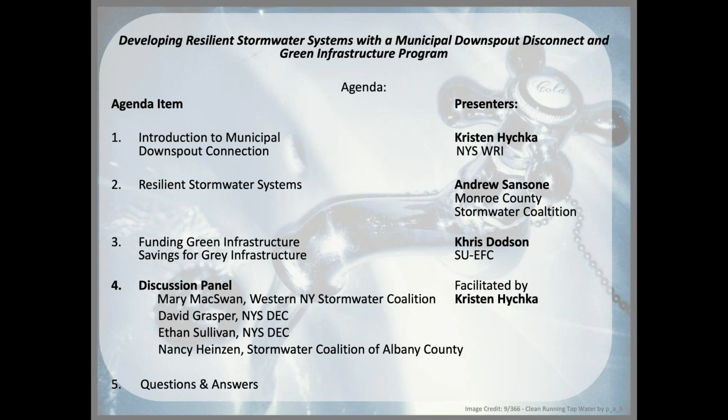And so I'm going to exit out here and hand over the presentation to Kristen.

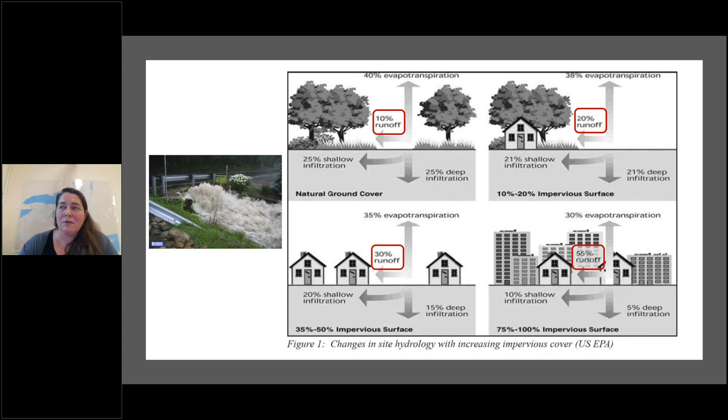So why are we here? You showed up, so you have your reasons for being here. But generally speaking, you all have seen this, or you live this experience. We're seeing increased runoff for a number of reasons. One being increased impervious surface cover, reduced infiltration, and increasing runoff.

Another piece of the picture here is that we're seeing more extreme precipitation happening in extreme events. What I'm showing right here is historical data. This is not any forecast. This is just looking at 1958 to 2016. What has been the change in extreme precipitation? In this case they're saying how much of your annual precipitation happens during those 1% largest storm events. So often what you're designing your systems to handle.

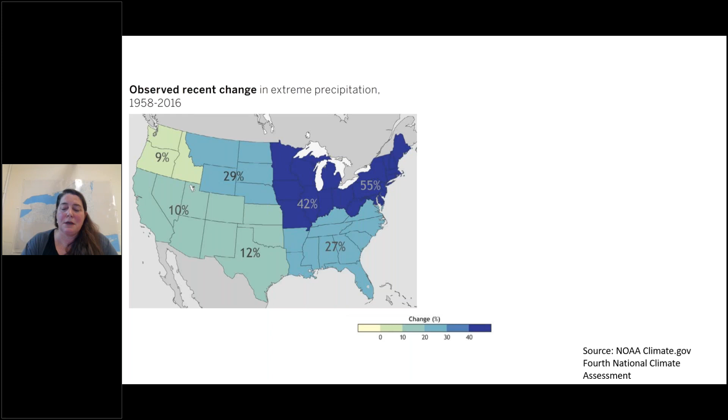And what this is showing is that there's a huge change, and we're right in the center of where all that change is happening up here in the Northeast. And this is showing forecasted, so projecting into the future, this is actually going to increase. As we get towards the later part of the 21st century, we're going to see even more of our precipitation coming in the form of extreme events. As we all know, there is some uncertainty around that, but we're definitely seeing that in the data already. Again, as I said, on the left here, these are observations we're seeing.

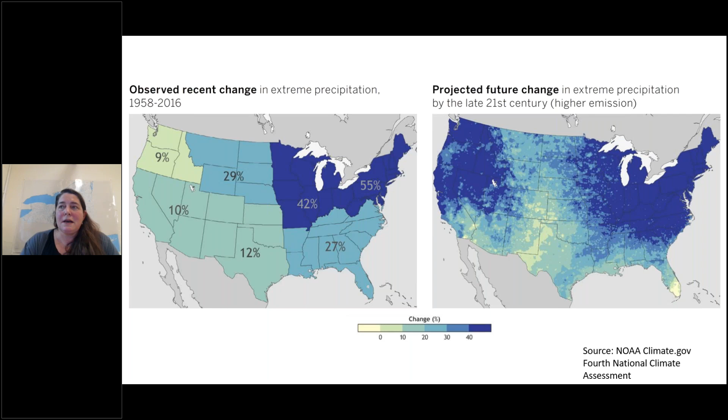So all this is happening in the context of New York State, where in many places we have aging and undersized infrastructure. In 2017, this is just one piece of information about that from the New York State Comptroller: they estimated we needed $80 billion to repair, maintain, and replace drinking and wastewater infrastructure in New York over the next 20 years. That isn't just talking about this undersizing issue, it's obviously much more than that, but it gives a sense of our context, what you all are dealing with. You are all on the front lines. You are all trying to make decisions about how to maintain and improve New York State's water infrastructure.

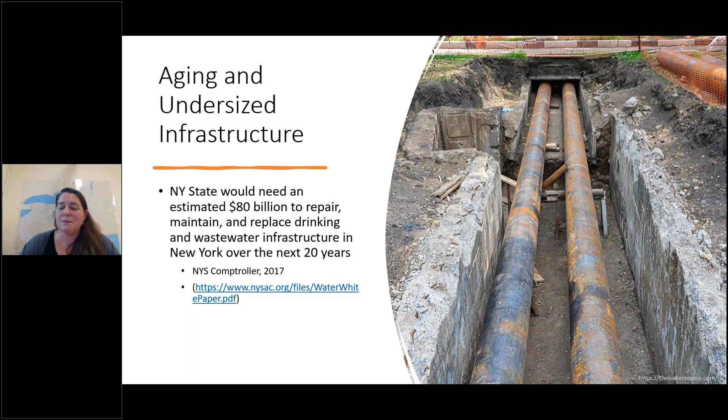So one piece of this puzzle is, ooh, and some of my graphics didn't come through here. That's all right. So can you see my pointer, Meredith? Can you see that? Yes, we can.

Great. Okay. So basically, when we're talking about disconnection, and I'm guessing most of you are familiar with this, connections are when a downspout, or, and we don't show it on here, maybe a sump pump from houses or buildings, is connected directly to the sanitary sewer system. So not just the sewage, but during rain events, you're getting water into the sanitary sewer system from houses.

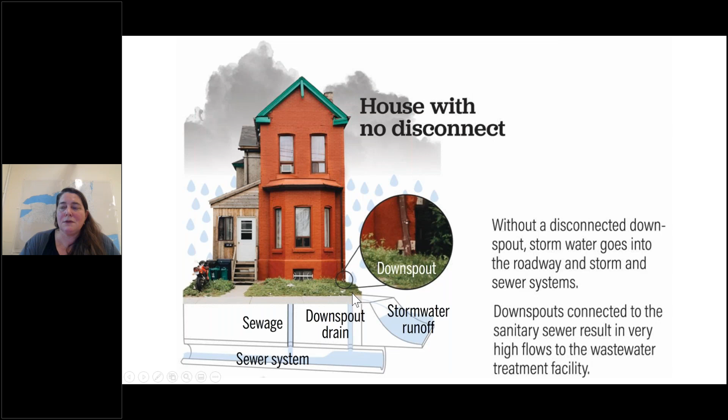So this is from the town of Olean, and what they estimate is that a typical 8-inch sanitary sewer can handle domestic sewage from 225 homes, but it only takes 5 sump pumps operating at full capacity to overload an 8-inch sanitary sewer. So this can be a huge problem in your municipality.

So this is when, and unfortunately this whole graphic didn't show up, but basically what it's trying to show is that one of the things you can do is disconnect those connections. So take out your downspout and your sump pump connections. What ends up happening is you'll get less water into your sanitary sewer system. You may be exacerbating local flood conditions.

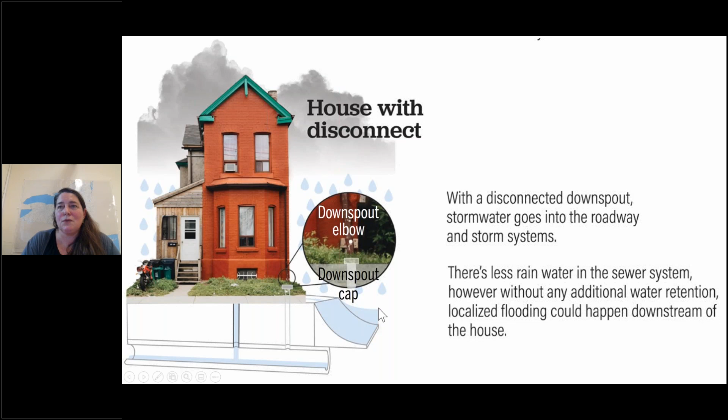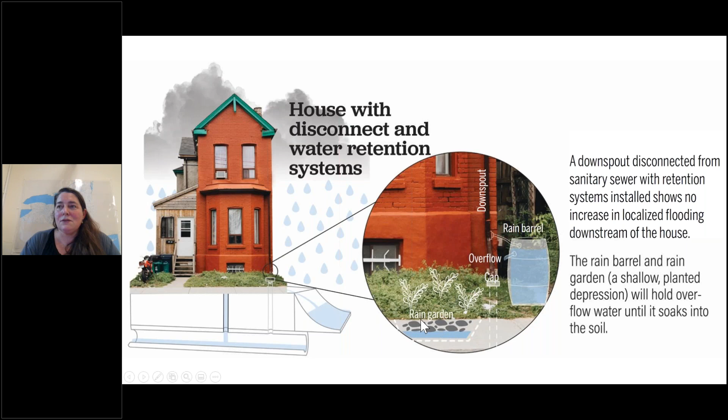So pairing this disconnect with some kind of localized green infrastructure program, not only will it reduce these connections to the sanitary sewer system, but also provide these localized benefits. So generally, it took us a while to come up with a title for this. There's a lot of pieces to what we're talking about.

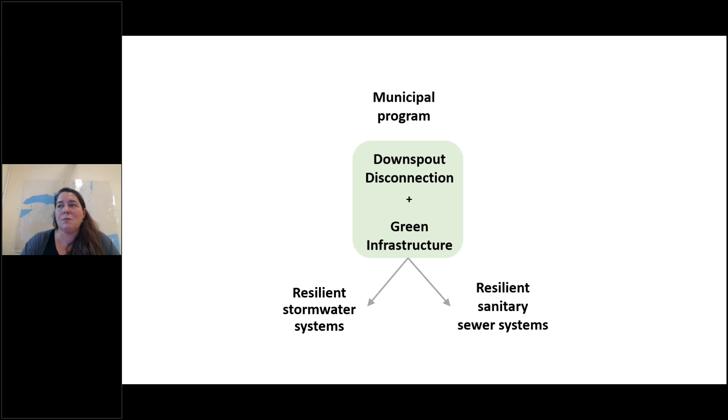But basically, what is the program or the coordination that you could put together either at a municipal or regional level that deals with connecting disconnection with green infrastructure to improve and create resilient stormwater systems and resilient sanitary systems? And we're fortunate to have our next speaker talk about this in more detail.

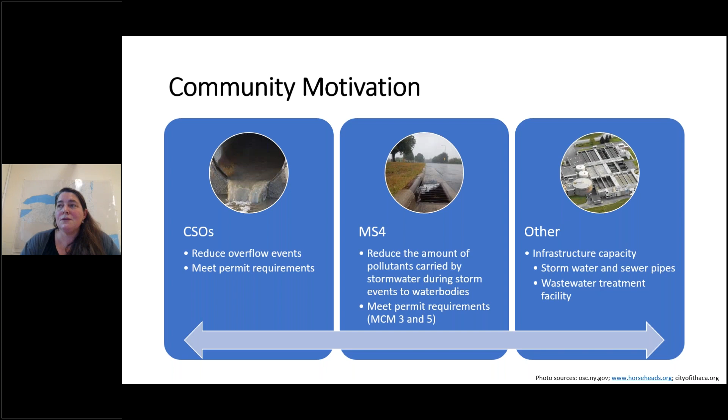Community motivation. So again, our next speaker will talk about this too, but we're all coming from different regulatory coordination levels. And so some people are doing these programs because they're a CSO and they're under a decree. It may be an MS4 and you have permit requirements, or others are just dealing with infrastructure capacity issues. So one example in a CSO is Washington, D.C.

They created a big program, Drain the Rain and Clean Rivers Project, where they developed a voluntary program for free downspout disconnects, free rain barrels, and free technical assistance and design. So they actually had people coming out to the site.

So I just have a minute here, so I'm going to breeze through this. But we put together a report kind of based on this experience. We had a master's of regional planning student who had worked at DC Water, and she was trying to pull some of the knowledge and experience into guidance that would help local municipalities.

So this is roughly the timeline of the steps: setting your baseline, determining your budget, determining your program structure, setting your timeline, target audience, and then structuring your outreach efforts. So I'm going to stop here just a minute, but talking with the speakers and panelists, they will get into this more. There's really more to this. You really need to assess your enabling conditions for green infrastructure and also think about funding for program development.

So I'm going to breeze through all this, but these programs can vary greatly in how they're administered, whether they're voluntary or compliance-based. The types of resources that are provided, are they free? Is there just some kind of incentive? And then how are you tracking it? So some of the resources we share are technical. There's an outreach strategy. There's a program comparison where you can see lots of different approaches. So there's many, many ways to go about this.

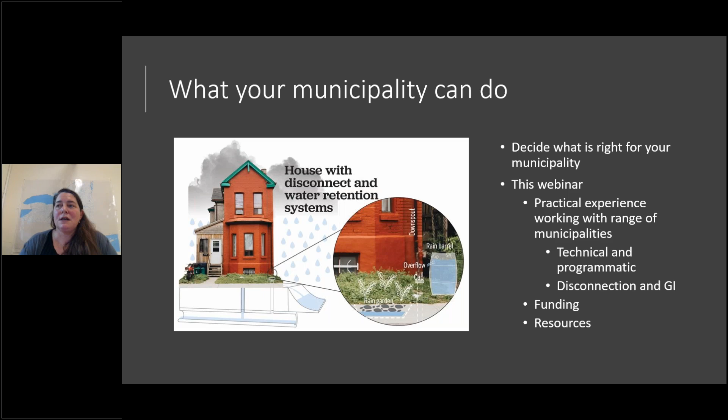And then there's a checklist, some of the first steps you could take and some of the questions you might ask. So to finish up here, again, decide what's right for you and your municipality. What are your motivations? What do your plans look like? And listen and hopefully use this webinar to learn from the practical experience of the folks that are on this call: technical, programmatic, disconnection, green infrastructure, and learn about funding and the resources that are available.

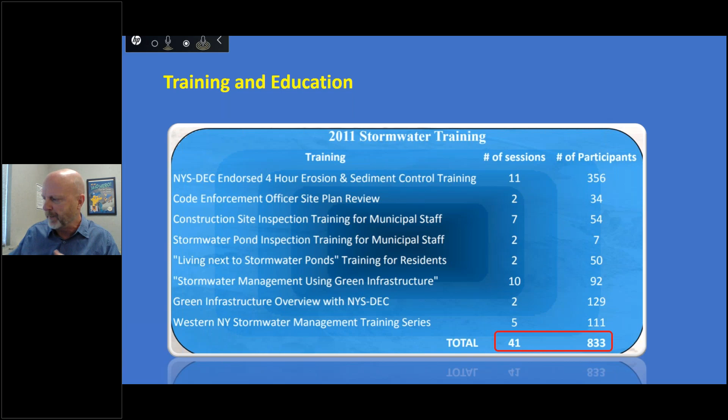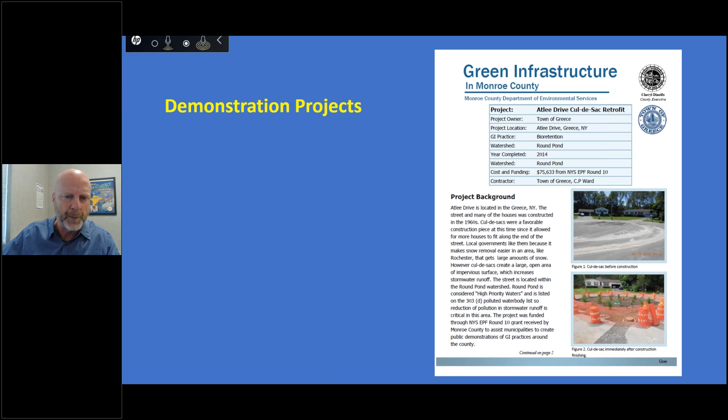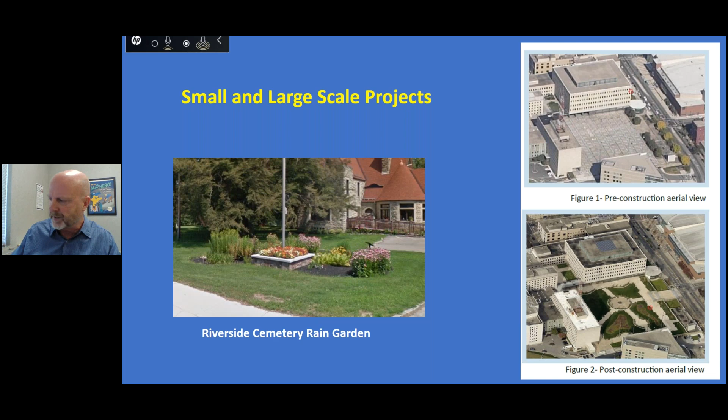So here's a little rain garden at a cemetery, and a very large green roof in the city of Rochester owned by the county. The roof is actually on a parking garage that's underground. So we took this large impervious area and built a green roof on it. So we tried to do these practices of all different shapes and sizes.

So what have been some of the obstacles? Of course, education, helping people understand what we're trying to do. Demonstration projects, some are successful, some are not. That's why you do them. And sometimes when you're the first one to do a porous concrete parking lot, and maybe it doesn't go well, that's what you learn from. That's what you're demonstrating, and so those are important.

The public and private. It's encouraging to see not only a lot of municipal people on this call today, but also a lot of private sector and consultants. We really have to work together to understand and develop and design these practices. And one of the obstacles that we saw right away was building codes, and that's something that Christian mentioned.

And a project that we did that was funded by a grant, we used the Genesee Regional Planning Council and Jamie Tholman, if many of you know her. We did this assessment with a half a dozen or so municipalities, where we went through and used the Center for Watershed Protection worksheet to look at their codes. And what we wanted to see is, what are the obstacles to green infrastructure in terms of connecting or disconnecting downspouts, the size of porous pavement, the size of parking spaces, the number of parking spaces. All these things are in the municipal codes.

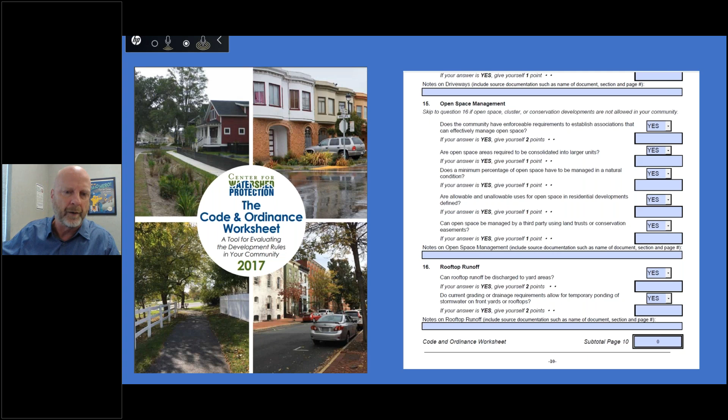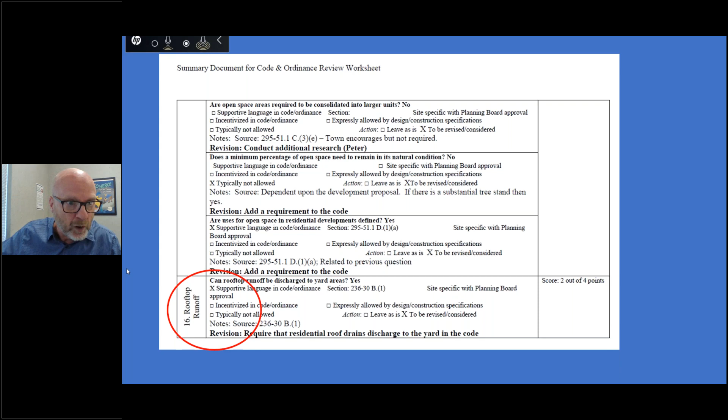And if you can understand where they are and go in then and change some of these codes to make green infrastructure a little bit easier to implement, then it just helps you. And so, in terms of downspout disconnection, one of the areas on this questionnaire was on rooftop runoff. And you can see, the question asks, is a disconnected downspout allowed? And some of the responses that we got to can rooftop runoff be discharged to yard area? In some of the cases, it was no. Planning board approval was required.

So anytime anybody wanted to build a new structure and have a disconnected downspout, it would have to go to the planning board for approval. So once you uncover that, then you can modify your code, which many of our municipalities did, to say the downspout can be disconnected if you have the appropriate soils, or if it goes to a rain garden or bioretention.

And one of the other bits was, is ponding water allowed? The reason downspouts are connected largely is people don't want ponding water in their yards. And so, if you want to allow a disconnected downspout, you may have to modify your code that says, yes, ponding water is allowed for a certain period of time.

So that was a big obstacle for us, and I think we overcame that in many areas. And so here we are today, 2021. We're in, I guess, what we think of as the implementation phase. We aren't doing quite as many demonstration projects. Mostly what we see with green infrastructure is from new construction. We aren't doing a lot of retrofits, unless it's a redevelopment project, and I think that's a funding issue, right? So we would like to do some things in right-of-ways and municipal property, but it comes down to funding and being able to do that.

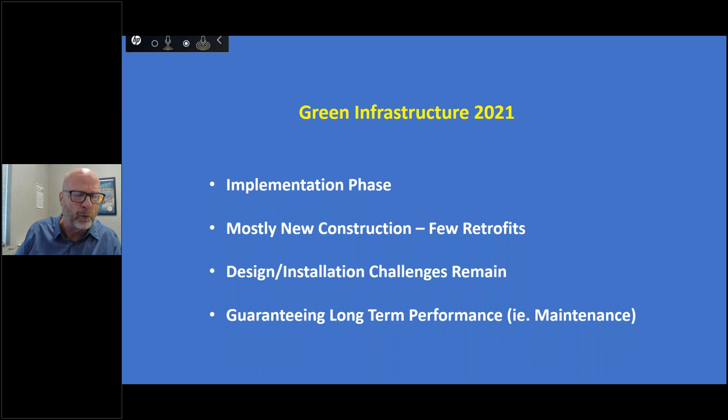Design and installation challenges, we had those early on, and we still occasionally see that, where we have a practice that doesn't go in quite as it's designed to do. Kind of one of my main interests is guaranteeing the long-term performance of these. And that comes down to how we're going to maintain these practices, along with the practices that we already have.

So just some examples. So here's one, a design or installation flaw. We're not sure which one, but here you have a bioretention, you have a curb cut, and the water comes in and just directly goes into the catch basin. So all the vegetation is above the water line, so to speak. So it's really not a bioretention. So we're not sure if this was a design or an installation problem. My thinking was an installation. We've run into some challenges where folks don't generally understand what the function of some of these types of things are.

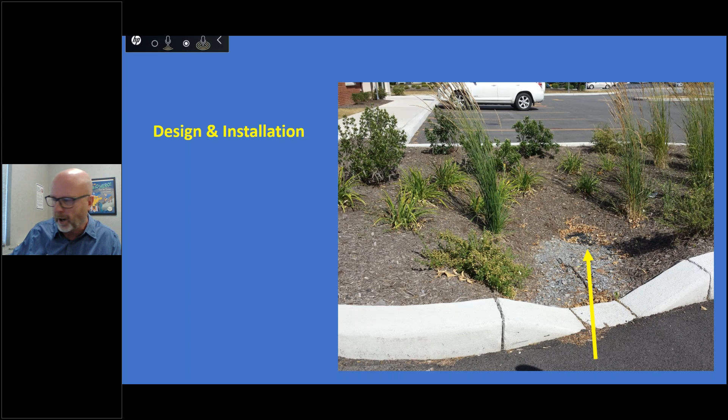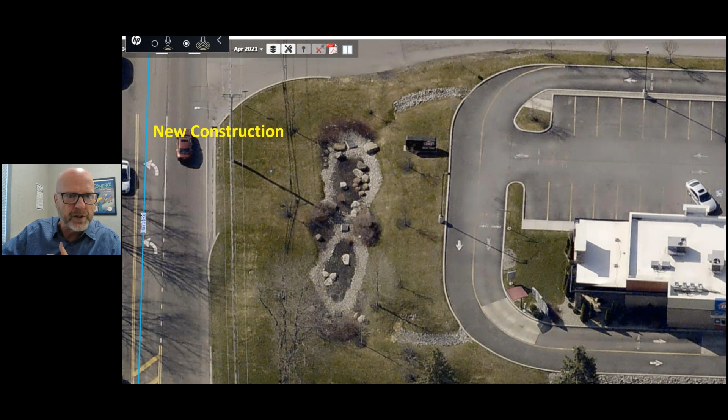But we get a lot of new construction and a lot of it goes in fairly well, right? So here's commercial development, kind of what's become the standard practice for us for bioretention. This is a county facility, our fleet center, where we did a big project. We built this building, and to be honest, the simplest practice we could put in was downspout disconnection. It really requires no maintenance other than the soil area, the vegetated area here where the water is going to run. It's a simple practice. We needed something in this area that was going to be low maintenance, and we went with the rooftop disconnection. So we're pretty happy with how that's gone so far.

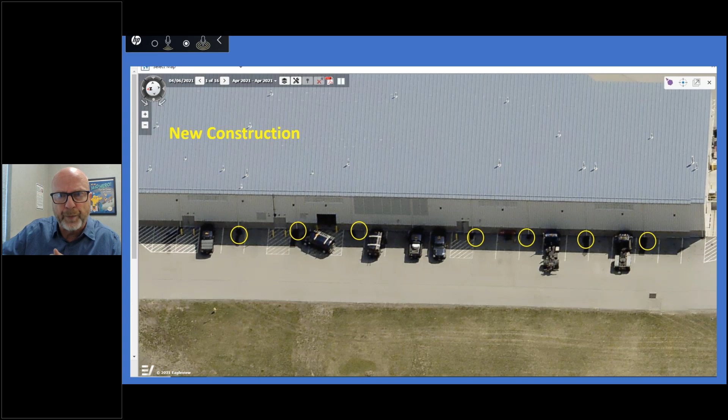And one of the ways we've tried to address that is a couple years ago, we developed a stormwater management practice dashboard. So we mapped out every stormwater practice in the county that included ponds, dry ponds, alternative practices, and green infrastructure. All the dots represent a practice, and the various color dots represent ones that have been inspected. And really long term, this is a good way for us to keep track of what's been built, what's in the ground, and how we are going to inspect and maintain these. And this is a way for us as the county not so much to oversee this, but to look at how these are being done. If we have some municipalities that are struggling with the inspections and the maintenance, how can we help them with that?

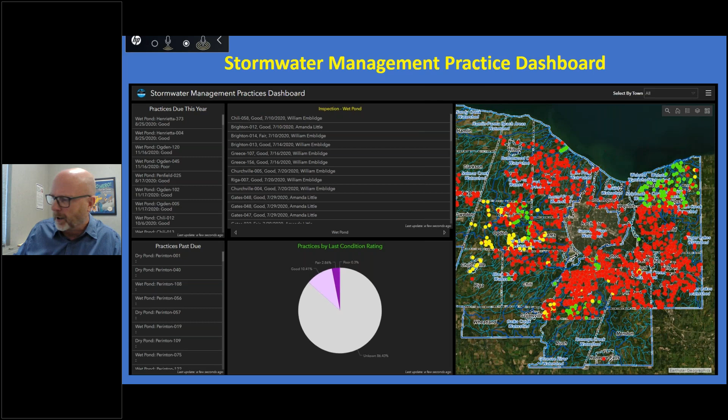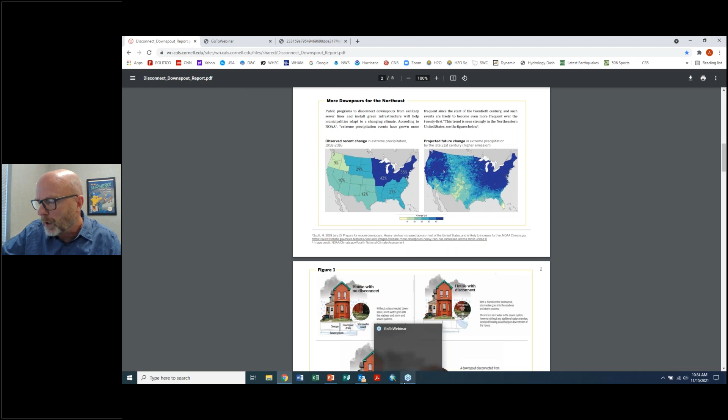I'm going to hand things over to Chris right now. Khris Dodson is our next speaker. Chris is the Associate Director of the Syracuse University Environmental Finance Center, and he's going to speak with us for a few minutes about funding for green infrastructure, and also the flip side of that, which is savings for green infrastructure, cost savings that green infrastructure and downspout disconnection can realize.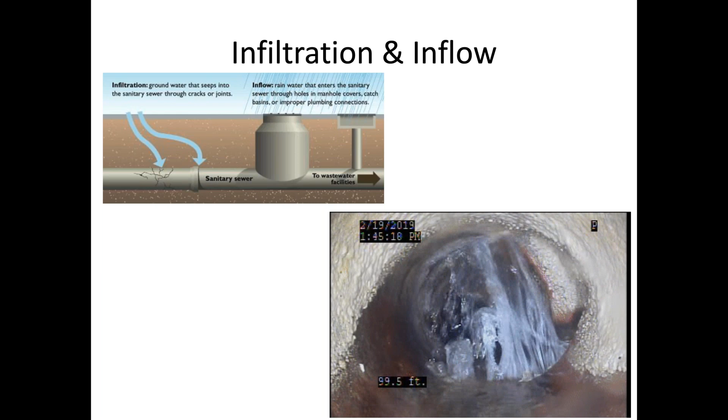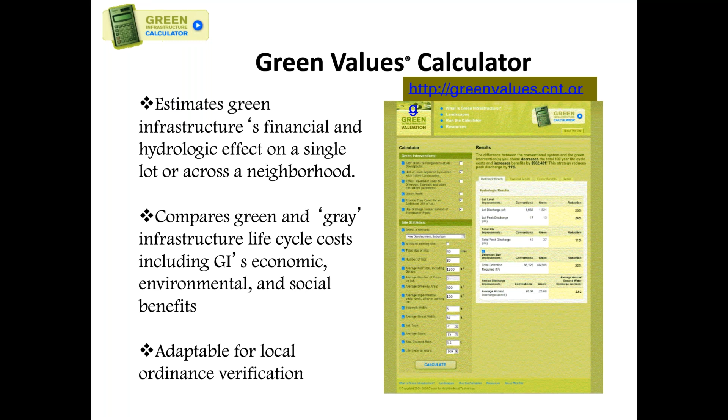Great. Chris, did we lose you? Can you hear me? Yes, we can. Yeah, you did not lose me, but you lost my PowerPoint. If you can give me a minute, my machine just closed my PowerPoint because it thought that was a good idea. No problem. Hey, I have another poll question. I'm just giving you a second, Chris. We could run it. Let's do that. Yeah, Microsoft shut down my PowerPoint. So why don't you go ahead and run that while I try to open it again. Well, and it gives you a little bit of space to get this open again.

So I've got another quick question. This is another very informal question, but it helps us get a little bit of information about our audience today. So I'm going to go ahead and launch a poll one more time, and this is an interactive piece with you all. Our question is: is your municipality, or municipalities you work with, part of a stormwater coalition? Just go ahead and select an answer there, and this will give us a sense of whether or not you all are participating in stormwater coalitions.

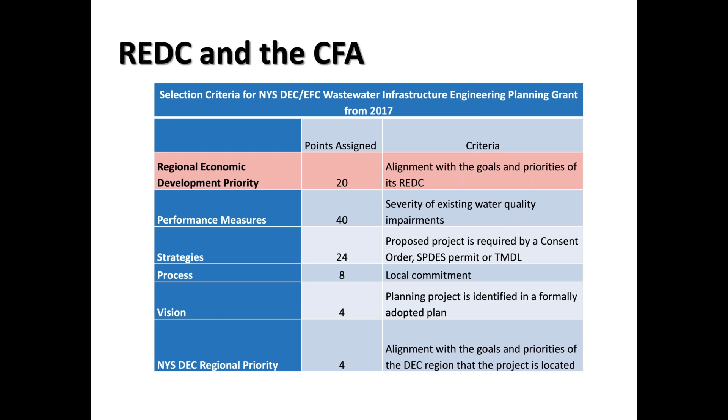And then the available CFA resources. And I'll talk about a couple of those specific ones here in a second. And, again, the CFA available resources is like 200 pages. But if you're interested in the Green Innovation Grant Program, you can toggle very quickly to where that description starts, and then there's 3 or 4 pages that describe that specific program. So everything is listed there, and it's very easy to navigate. So again, before I move on, there's the website.

When the CFA opens next spring, there will be public meetings. I assume, because COVID has introduced the ease of virtual meetings, there'll probably be some virtual ones, but there will probably also be in-person ones as well. So just a couple of programs I wanted to mention that are focused on today's topic. So the WQIP, Water Quality Improvement Project. This is a New York State DEC program. And I know we have folks on from DEC and EFC, so if I misspeak or if you have any other information, please share it when you can.